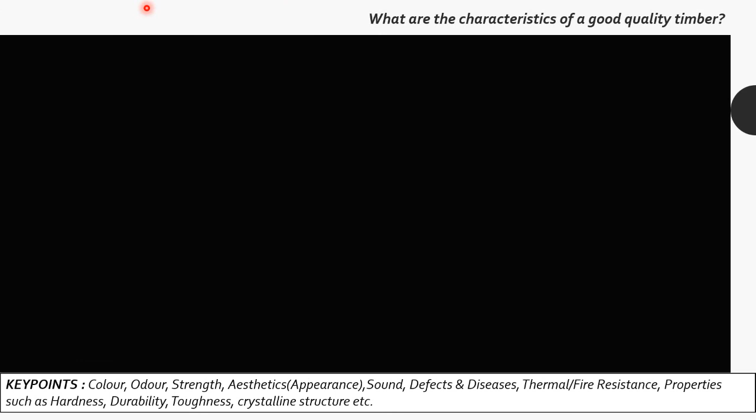Now the question is, what are the characteristics of a good quality timber? One can begin his or her answer by saying that a good quality timber is essential to withstand the threats in the atmosphere or the load it has to resist, and to ensure the stability and longevity of a structure.

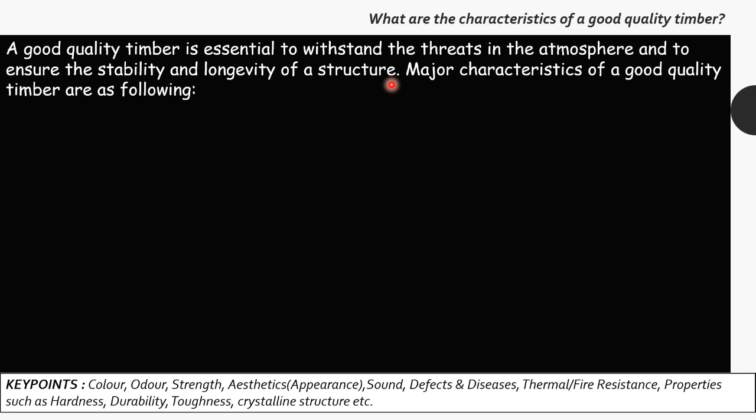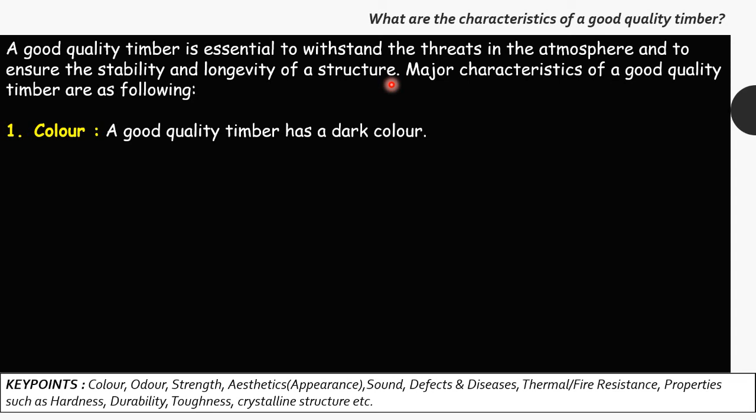After writing this first line, we can discuss the major characteristics, such as a good quality timber has a dark color, whereas a light color often portrays a timber which is not having sufficient strength. Second is odor or the smell. A decayed timber produces unpleasant odor. However, a good quality timber imparts sweet fragrance.

Third point could be strength, as we have mentioned in the keywords. Although it is not as much used as in earlier times, when timber was utilized as an element in the structure, timber is still used as beams or props at various places.

Therefore, we can write that, however not in that intensity as compared to former times, still timber is frequently used as props and as various elements in a structure, such as beams, and often abroad there are places where timber or wood is used for construction of structures or buildings. For this purpose, it is imperative that it possesses adequate strength to resist load. It must have sufficient weight also. Heavy weight should be there.

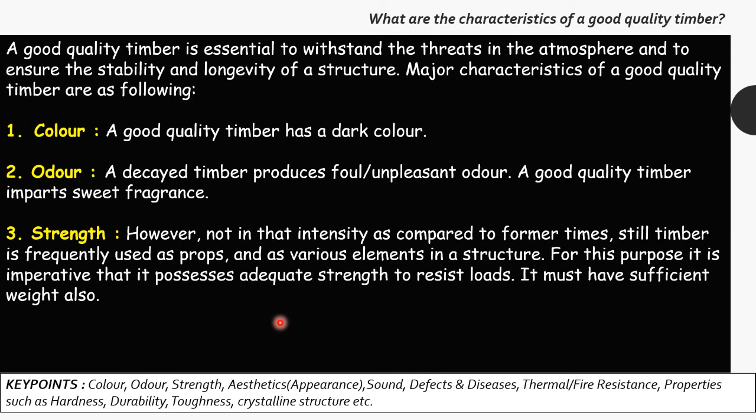Fourth point could be appearance or aesthetics. A good quality timber should be hard and must appear shiny. There should be no wooliness in a freshly cut timber. Wooliness could be defined as the fibers that arise out of the timber when it is cut.

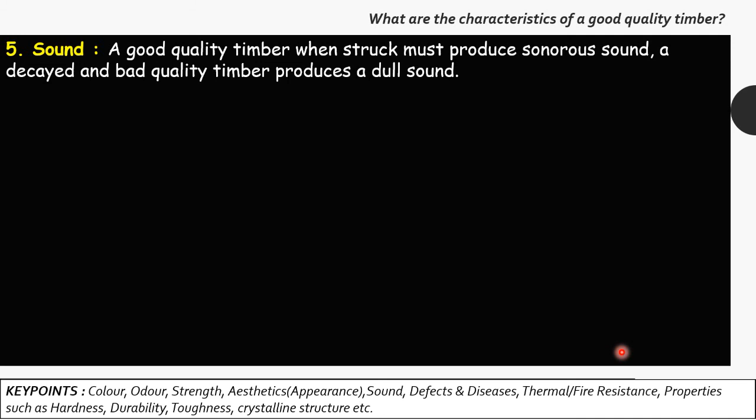Now, further, the fifth point could be sound. When struck, a good quality timber must produce a sonorous sound, whereas a bad quality timber produces a heavy or dull sound. Sixth point could be defects and diseases. A good quality timber should be free from any disease and defects.

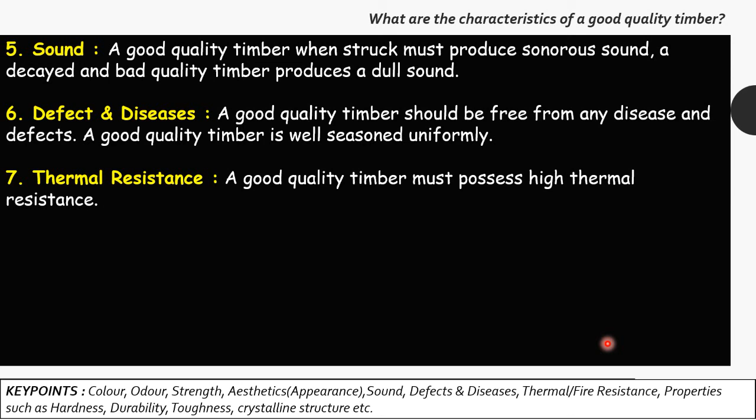Thermal resistance or the fire resistance. A good quality timber must possess high thermal resistance so that it can withstand high temperature and also sustain the thermal effects, or in case of a fire outbreak, it does not collapse immediately.

Eighth point could be structure and composition. A structure of a good quality timber must be uniform, and fibers within the structure should be firm. It should have compact medullary rays and narrow annual rings. Narrow annual rings depict that it has a good strength. That is, closer the rings, greater is the strength. Therefore, compact medullary rays and narrow annual rings.

Now, there are miscellaneous properties also, that a good quality timber must possess sufficient toughness and hardness. It should be durable against the microbial activity and environment.

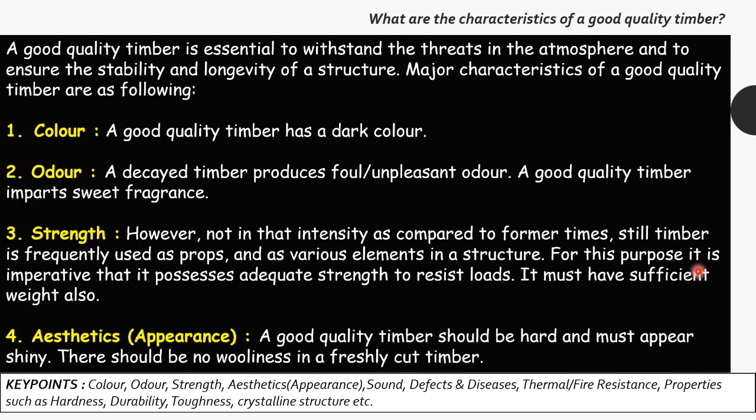Therefore, overall, this could be our answer, in which we could write out the major points, which are color, odor, strength, aesthetics. Then we can also discuss sound, defects and diseases, thermal resistance, structure and composition, and miscellaneous properties. We have clubbed hardness, toughness, and durability into miscellaneous properties, but one could also write them separately.